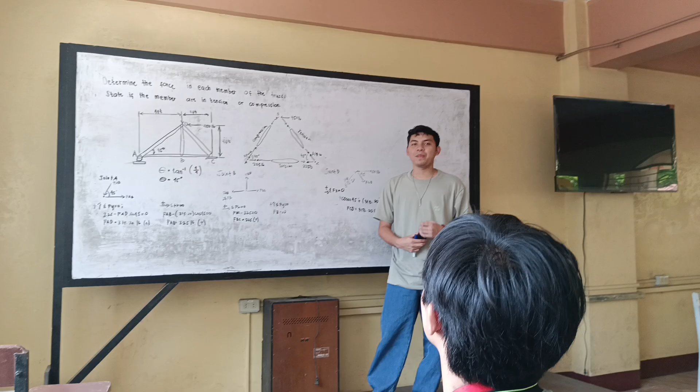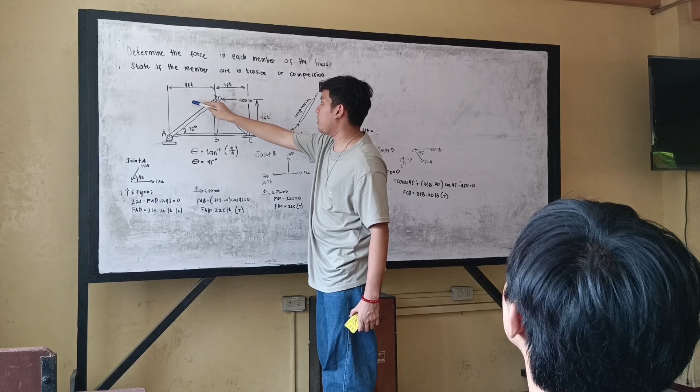If the member are in tension or compression. Here's our diagram. We have A to D, and B to C have a 4 feet diameter, and we have a force going to the left, 400 lb, and we have D to C with a height of 4 feet diameter.

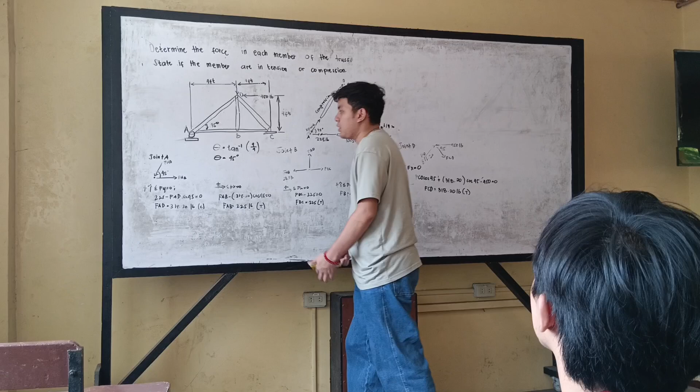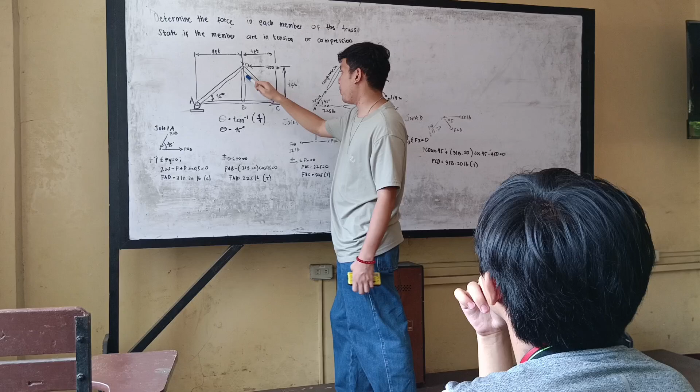First we're going to get the angle of each side. To get the angle of this side, we have theta equals tangent inverse of 4 over 4 equals 45 degree. So we have 4 over 4. If you draw a triangle, we have 4 feet in this area and 4 feet in this area. So we have a 45 degree angle.

Going to solve joint A, we have FAD going downward at 45 degrees, and we have FAB going to the right.

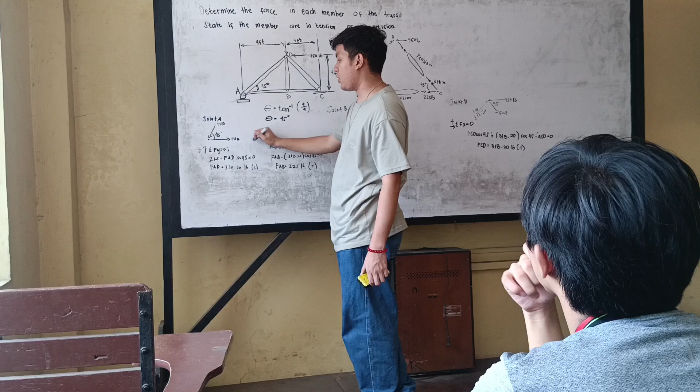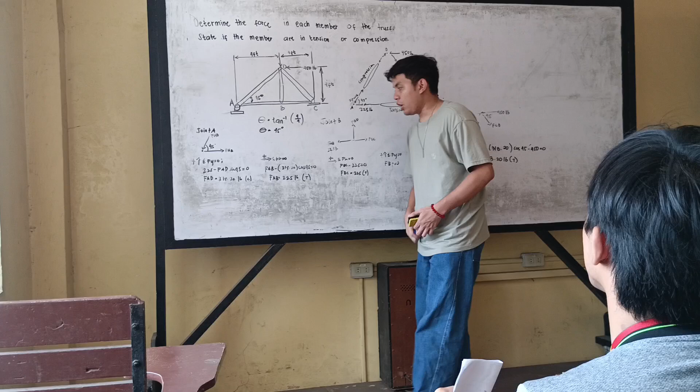First we're going to get the summation of Fy equals to 0. We have 225 minus FAD sine 45 equals to 0. FAD is 318.20 lb compression. We're going to get the summation of Fx equal to 0. We have FAB minus 318.20 cosine 45 equals to 0. Our FAB is 225 lb tension.

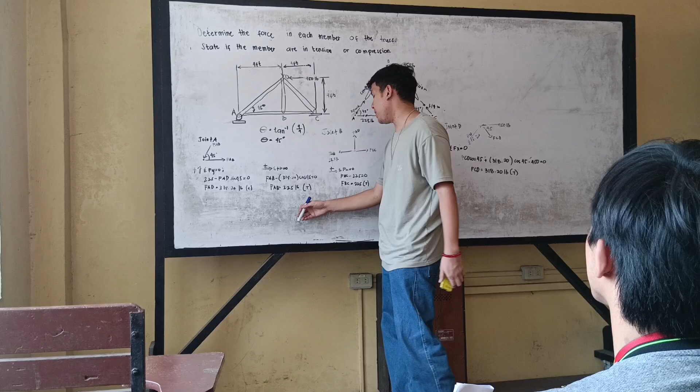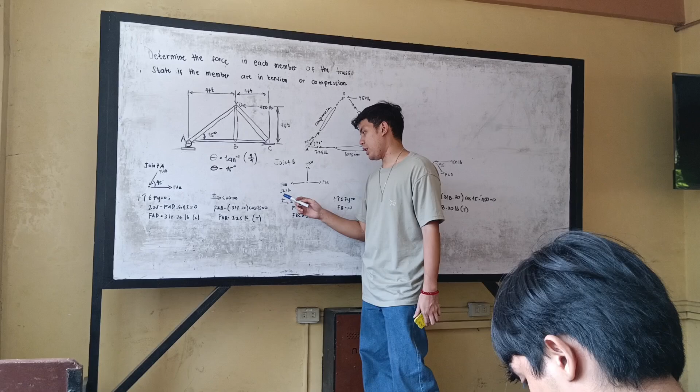Second, we're going to get joint B. We have FBD going upward and FAB going to the left, and we have 225 lb since we got FAB as 225 lb. And to the right, we have FBC.

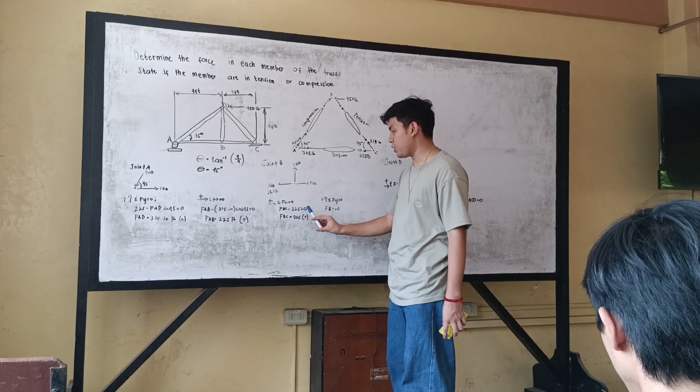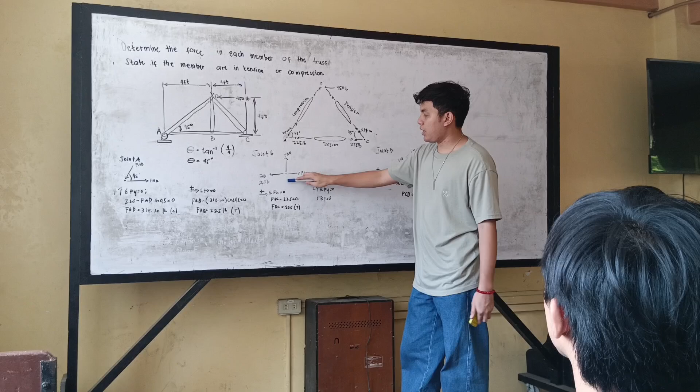First we're going to get the summation of Fx equals to 0. We have FBC minus 225 equals to 0, so FBC is 225. And second, we have summation of Fy equals to 0. Since FBD force is along the y-axis here, FBD is 0.

So the last is joint D. We have FAD going upward at 318.20, and we have FCD going downward at angle 45, and we have a force of 450 lb.

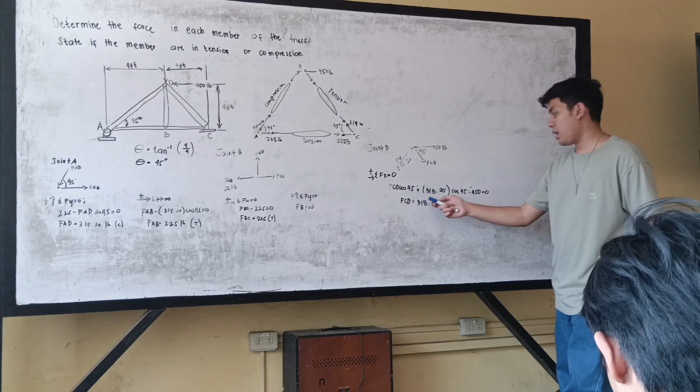To get the summation of Fx equal to 0, we have FCD cosine 45 plus 318.20 times cosine 45 minus 450 equals to 0. Our FCD is 318.20. And lastly, is the diagram.

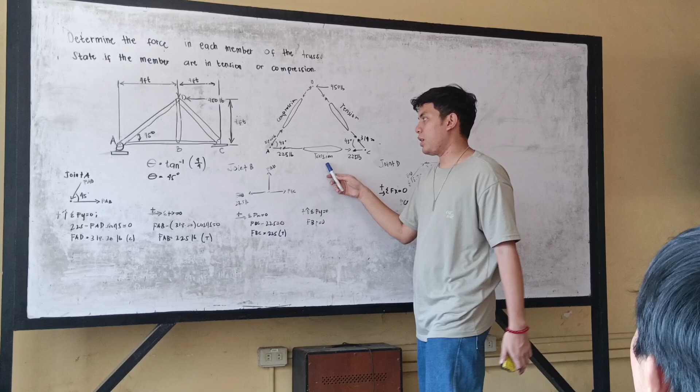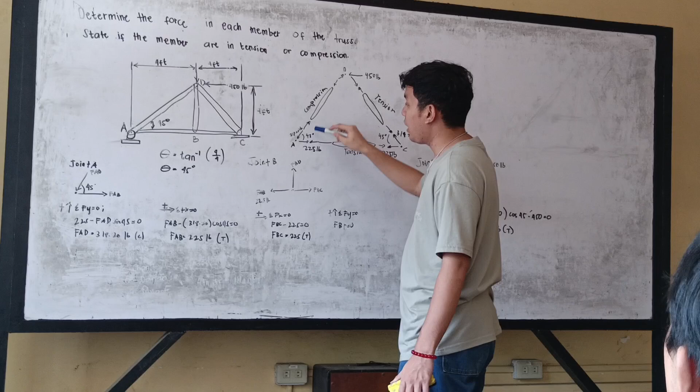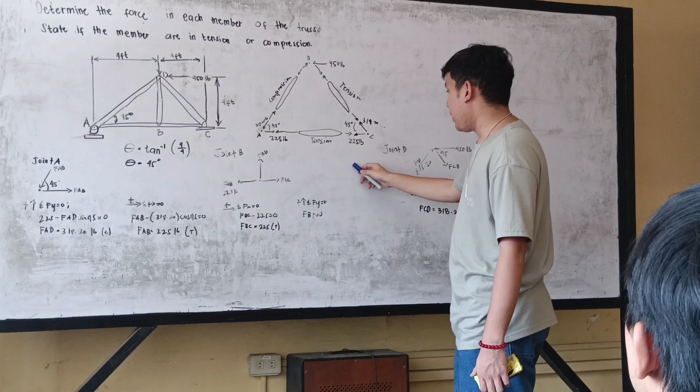And we have our joint B, we have FBC 225 going to the left side, so our FBC is tension, 225 lb.

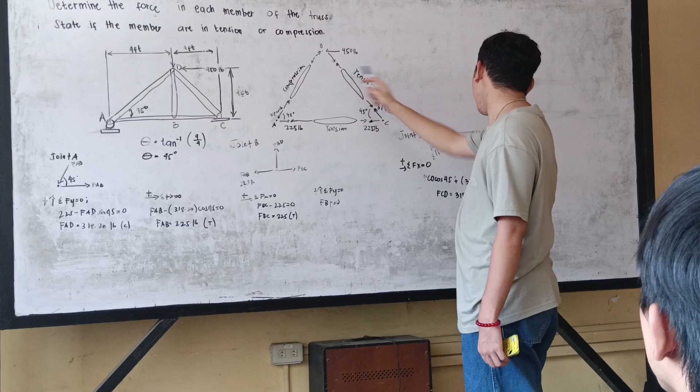And our joint D, FAD going downward 318.20, and this one is compression. We have 450 lb, and FCD going downward, so our FCD is 318.20 and tension.